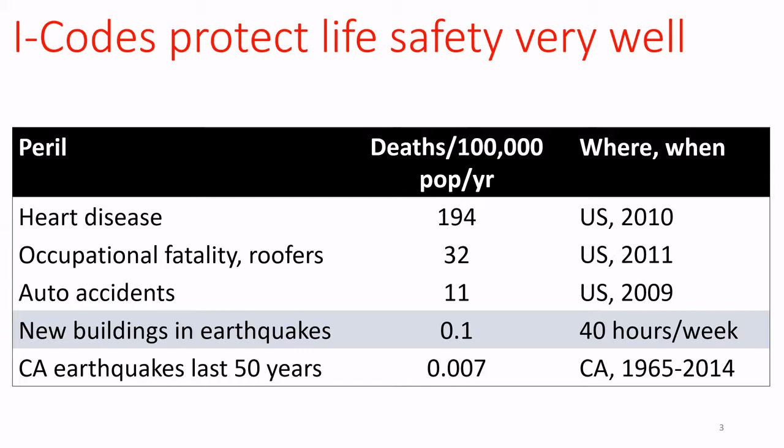California fatality rates of the last 50 years have been more than an order of magnitude smaller than that in terms of killing people. So the building codes do a really good job of what they're trying to do, which is protect life safety. But are the I codes ethical? Can they be said to be ethical? Now, ethics imply some deliberate choices about what one should do, what should be in the code, for instance, what should be the code's objective. What choices have the code writers actually made as they developed codes?

Now, codes have developed over many, many decades. You can track model building codes in the United States, at least seismic provisions, back to the 1927 UBC, where a handful, 2, 3, 4 building officials or structural engineers sitting around a room decided that if they made buildings resist 10% of their weight in lateral side-to-side motion, that was practical and okay. And that's as much thought as went into that process. Maybe that's oversimplifying slightly, but not much.

For the next several decades, we designed by a design paradigm called allowable stress design that did not allow us to quantify the risk inherent in the code. Now, in 1980, some pioneers of load and resistance factor design created a new design paradigm where we actually could quantify the risk inherent in our buildings, the risk of life-threatening damage. They back-calibrated the design requirements to achieve the level of safety that was implicit in prior codes. That is to say, they didn't adjust anything.

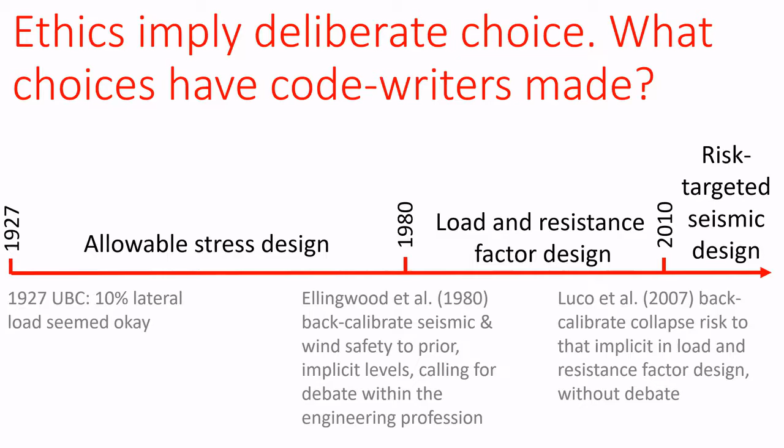With this back-calibrated level of collapse risk, which was back-calibrated to life safety, the probability of life-threatening damage, which was back-calibrated to allowable stress design, which had no deliberate choices made. So we never deliberately chose our resilience goals for buildings. Why did we never do so? I would assert that it's because we engineers, the people who, for the most part, write code objectives, have never been trained to do so.

We are very good at understanding science and making things work. If you set us a goal, we will be very good at achieving it. But we are not good at setting the goal itself. And what we did by just back-calibrating implies that whatever was acceptable in the past is therefore good. An 18th century moral philosopher named David Hume showed that you can't do that.

You can't say that whatever is, is okay. You can't get an ought from an is. That's called Hume's law or Hume's guillotine, or the fact-value divide. You can't infer that we ought to have a degree of risk currently in our codes just because that risk is present in past codes.

Okay, so if engineering is ill qualified to set what level of safety ought to be in building codes because we don't study oughts, what branch of scholarly study does? What branch of scholarly study focuses on norms or shoulds or oughts? And what are its three approaches?

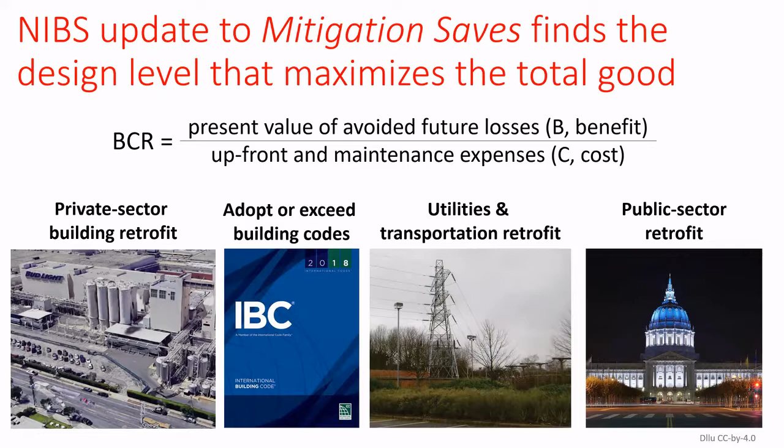And in that second category there, adopt or exceed building codes, we actually found a way to find the design level that maximizes the total good, that achieves Bentham's utilitarian ideal. Now, in doing so, we had to add up all the public benefits from all these different kinds of natural hazard mitigation. We weren't able to add them all up.

We were able to turn into monetary equivalents avoided future property damage, avoided future direct business interruption, that's DBI, indirect business interruption, that's the business interruption that you suffer because my business goes down and you buy or sell, you trade with me, and avoided additional living expenses, that's ALE. We also used monetary equivalents of deaths and injuries avoided, future cases of post-traumatic stress disorder, a little piece of the insurance premiums that people pay, some environmental losses, and we also count jobs gained and savings to the federal treasury.

Now, it would be better if we were able to count all of the benefits that mitigation provides. Avoided social stress, that is to say, the fact that your kid can go to school in his or her school tomorrow the same as he did today, that's a benefit. Saved mementos, memorabilia, protecting culture, protecting disadvantaged populations, our pets, and the environment. These are largely intangible benefits that if we could turn them into monetary equivalents would increase our benefit-cost ratios and make mitigation look better.

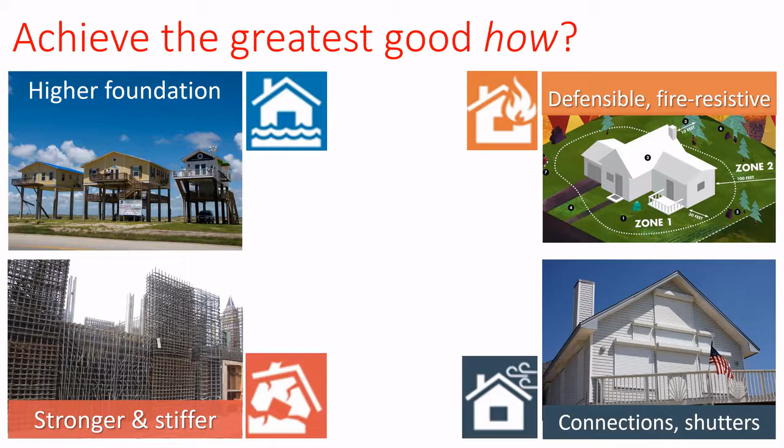Okay, so the building codes have developed over decades. Let's talk next about how much good that development has done in the past. The seismic and wind design provisions have evolved since about 1927, at least in the Western United States. And it's possible to read every one of these editions of the Uniform Building Code and the International Building Code and calculate the strength and stiffness of new buildings as if they were designed to each one of these codes. We did all that. We put it into a great big spreadsheet, and we found that buildings have generally gotten stronger and stiffer over time.

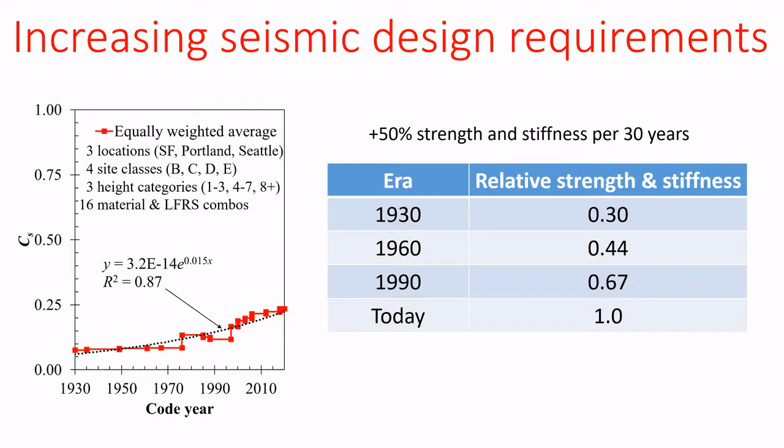And you can see that when we take a whole bunch of different buildings and a whole bunch of different locations and a whole bunch of different height categories and just sort of equally weight them, we find that new buildings have gotten stronger and stiffer by about 50% about every generation. So every 30 years, a new building built in the exact same place as an old building would be 50% stronger than that old building would have been designed. So codes have made newer buildings gradually stronger and stiffer.

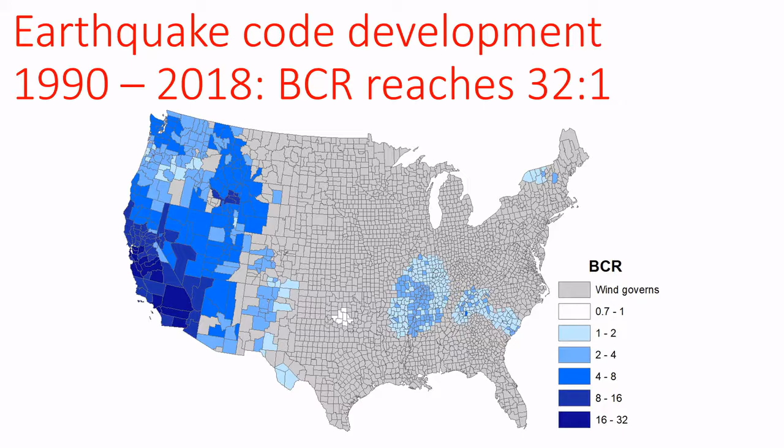All the gray areas are places where the wind forces are greater, so we can sort of ignore the code's seismic provisions there. But in any case, the building code's development over the past several decades has done society a lot of good, with benefits greatly exceeding costs by as much as 30 to 1. On average, overall, over the entire country, that nationwide average is 12 to 1.

But as I showed you on a chart a few minutes ago, we haven't leveled off at some ideal. What if we were to go higher? Is there some optimal level of strength and stiffness that we could put into our code to achieve that utilitarian ideal? So how do we know what is ideal? Engineering economics answers that question in general principle.

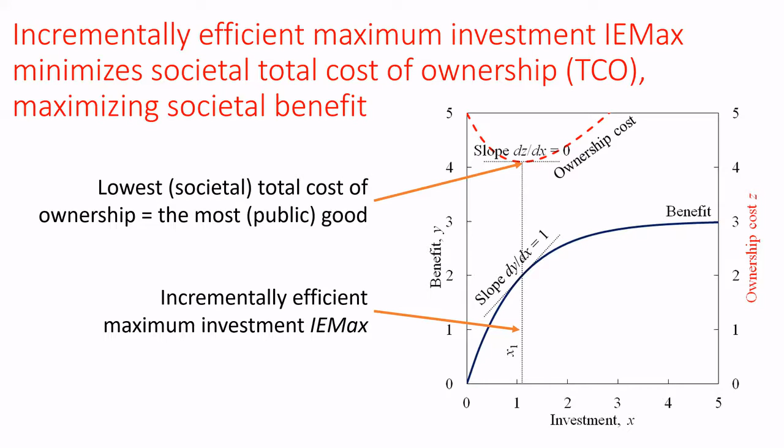So this is the least total societal loss, the least total cost of owning buildings for society, at the same point where this benefit cost ratio just reaches a slope of 1. That's the point that does the most public good for that building. Now, we actually did this for seismic loads. We didn't do a nice smooth curve. We set a few choices.

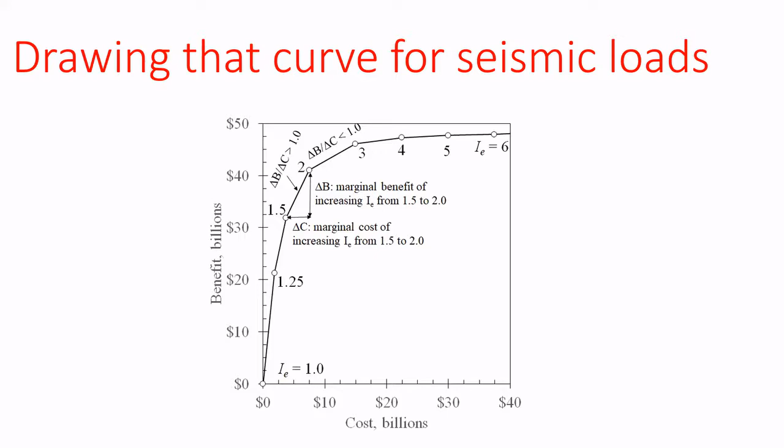In each census tract over the entire country, we considered what buildings are built there today, and what if we made them 25% stronger, 50% stronger, twice as strong, et cetera, up to 6 times as strong as the current code would require. So instead of a nice smooth line, we have this sort of jerky line of straight lines connected by dots, and we just find the last level of additional strength that has a slope greater than 1.

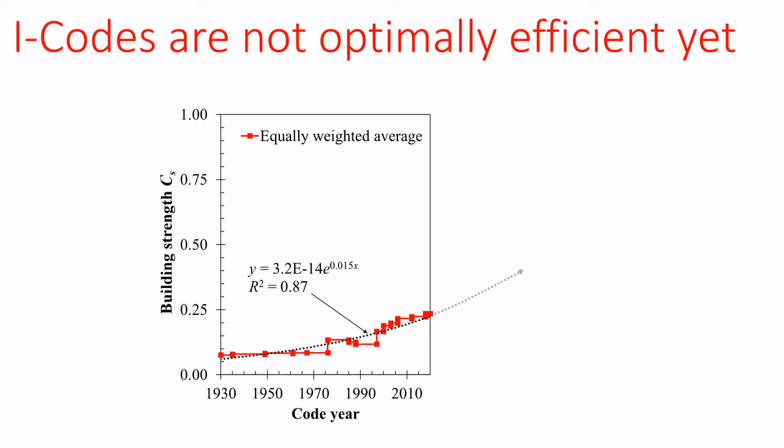And what we found was that we have not reached an ideal yet. So this is that plot I showed you earlier of how buildings are getting stronger and stiffer. And we haven't passed the point of diminishing returns yet. It is still in the future. That curve is going up, and if it continues to go up, the future will lead to more efficient buildings. Utilitarian optimal for seismic design is shown here on the right side.

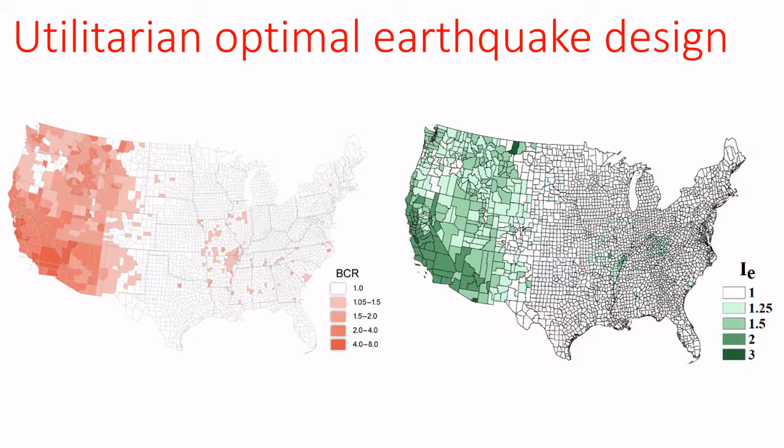The optimal level of design for several counties around the country is 3 times as strong and stiff as the code currently requires. But in many places, 25% stronger, 50% stronger, 100% stronger would be cost effective. On the left side, you're seeing the benefit cost ratios. So designing to the optimal level in many places around the country would save up to $8 for every additional dollar in construction costs.

Okay, so we did this for several perils, not just earthquake. We looked at riverine flood, hurricane surge, greater wind design, and adopting the International Wildland Urban Interface Code. And what we found was that the utilitarian optimum for these 5 perils has an overall cost to the country of $4 billion per year. That is to say, if we built to the optimum next year, new construction would cost $4 billion more in construction costs, but it would save society $16 billion in avoided future losses for an overall benefit cost ratio of 4 to 1.

And that means building houses and other buildings that are next to rivers with 5 feet of freeboard rather than 0, 1, or 2, which is what we currently do. Building coastal buildings basically 1 story above the 100-year flood line, base flood elevation plus 8 feet. And for wind, we looked at the IBHS fortified home hurricane standards. For earthquake, I've just talked about that, and I've just talked about the wildland urban interface fire. But you can see the benefit cost ratios are all in the range of 4 to 1 and up to 7 to 1, all very, very good returns for an investment.

So let me recap a little bit about the ethics of the building code. The current code is suboptimal in many places. Well-accepted fundamental utilitarian and duty ethics underlie the U.S. Constitution, and we found utilitarian optimal performance goals with well-established engineering economic principles. This is not pie in the sky stuff. This is using engineering economic principles just with the assumption that we should design to the level that benefits still just exceed costs. We found that leaving the current minimum in the rest of the country makes sense from a duty ethics perspective of just being fair across the country. And then together, utilitarianism and duty ethics could provide an ethical foundation for a resilient building stock.

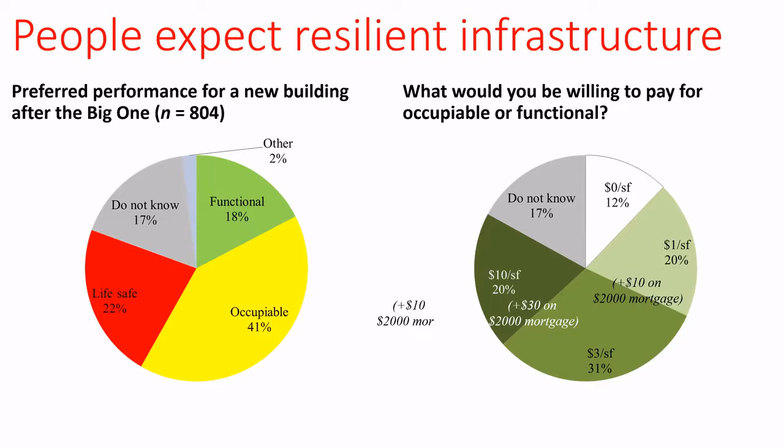The respondents were also asked, if you could get that level of occupiable or functional performance, would you be willing to pay $0 per square foot, $1 per square foot, $3, et cetera? And this was all expressed also in terms of additional monthly dollars on a $2,000 mortgage, so that they understood what it was that we were asking them. It wasn't just numbers that you couldn't really wrap your mind around. And as it turns out, yes, they would be willing to pay for what they were asking for. It would cost about $3 per square foot to achieve this level of performance of occupiable or functional buildings. Okay, so that's the public's perspective.

But we're not simply engineers and the public. We are a heterogeneous society with multiple perspectives. So what are the other perspectives that matter? Well, obviously jobs matter.

And as it turns out, building better would produce more jobs. The last 30 years of code development added 30,000 long-term US jobs that go into producing more construction materials. And optimal design would add another 60,000 more long-term jobs.

Affordability matters. Now, you increase the cost of construction, and maybe that impacts the affordability of housing and whatnot. But maybe it doesn't.

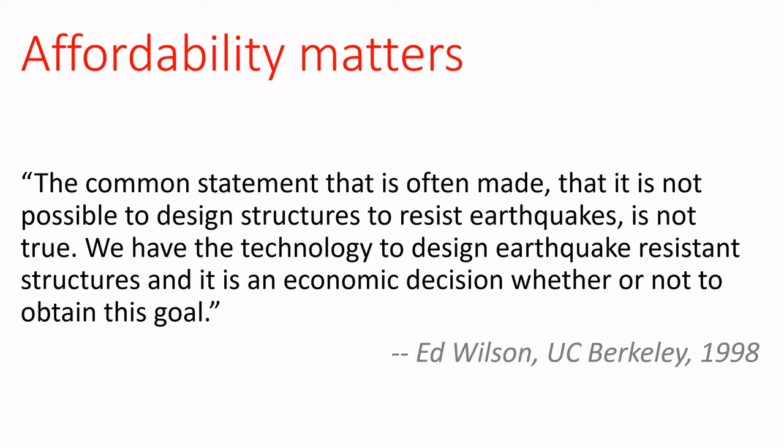A hero of mine, Ed Wilson, an emeritus professor at UC Berkeley, said several decades ago that the common statement that's often made, that it's not possible to design structures to resist earthquakes, is not true. We have the technology to design earthquake-resistant structures, and it's an economic decision whether or not to obtain that goal. So he's making this assertion a couple of decades ago. Let's find out if he's right.

Now, several studies have looked into what it would actually cost to make our buildings stronger and stiffer. In the lower left, you're seeing a study by the National Institute of Standards and Technology that found that making buildings about 60% stiffer and stronger adds about 0 to 1% to their construction cost. The CUREE-Caltech wood frame project, looking at one particular wood frame building, found that it would cost about 3% more construction cost to make that building better resist earthquakes.

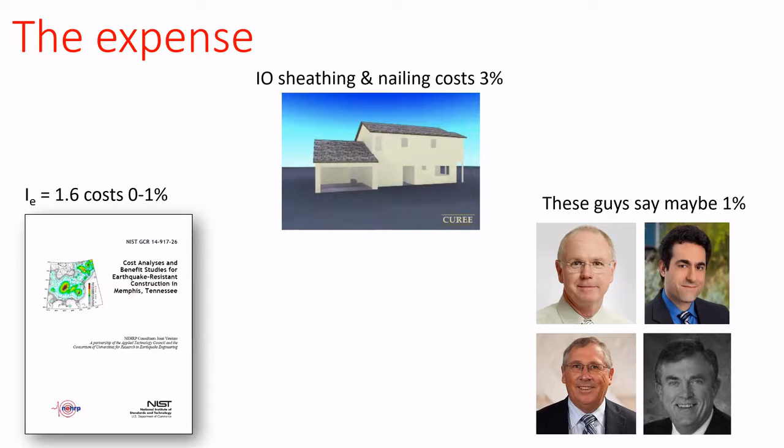And several leading structural engineers, when I asked them what it would cost to make buildings 50% stronger, said, order of magnitude 1%. So there's a little bit more evidence to suggest that the cost is on the order of 1%. Now, how can that be? How can it be that making buildings 50% stronger can only increase construction cost by 1%?

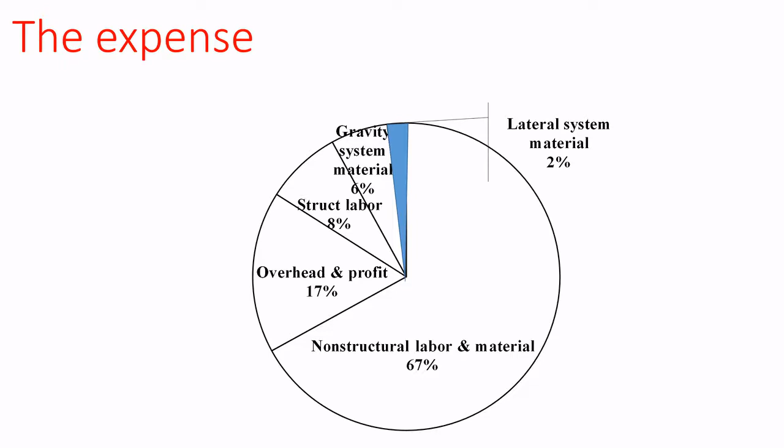Now we have further evidence that it's a very small cost because we do this all the time without actually thinking about it. We build buildings to varying levels of strength and stiffness depending on where they are relative to earthquake faults. We could build a building in downtown Los Angeles just to meet code, pick it up bodily. Imagine that you're Superman and you can pluck that office building out of the ground and fly it over to San Bernardino and pop it down into the ground there. It would be 50% stronger and stiffer than it would have to be if it were designed for San Bernardino.

Similarly, you could take a building in downtown San Francisco or downtown LA that just met code, put it down in Seattle, it would be 50% stronger and stiffer than it needed to be. Put it down in Sacramento, 50% stronger and stiffer than it needed to be. Twice as strong as it needed to be in San Diego. So we do this all the time without noticing.

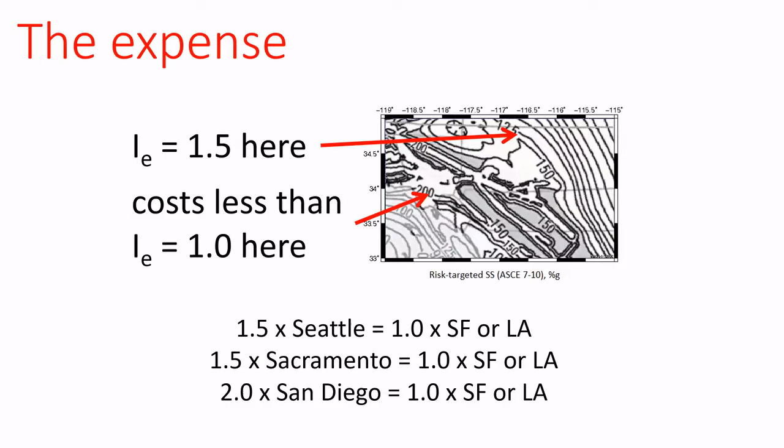Now, would the expense of greater strength and stiffness be objectionable? Lucy Jones, the famous seismologist, spoke with the Building Owners and Managers Association of Greater Los Angeles, and she said that most members of BOMA know the code is life safety, but they told me they wished it was higher. They don't want to own a building that'll be a total loss, but they can't afford to do it alone and be more expensive than their competitors. So greater cost is objectionable if you have to do it voluntarily, but maybe not if it is mandatory across the board.

A little bit more evidence that the code doesn't add much cost when it comes to developing seismic provisions is a study by Rob Olshansky and others in 1998 that said that the codes as a whole only add about 1% to the construction cost to meet seismic provisions.

Okay, so would that 1% affect affordability? Well, it's really hard to make that case when housing is already incredibly expensive. In San Francisco, housing costs $1,000 a square foot. In Santa Clara County, it's $600 a square foot, of which only a small part, 30 to 40%, is construction.

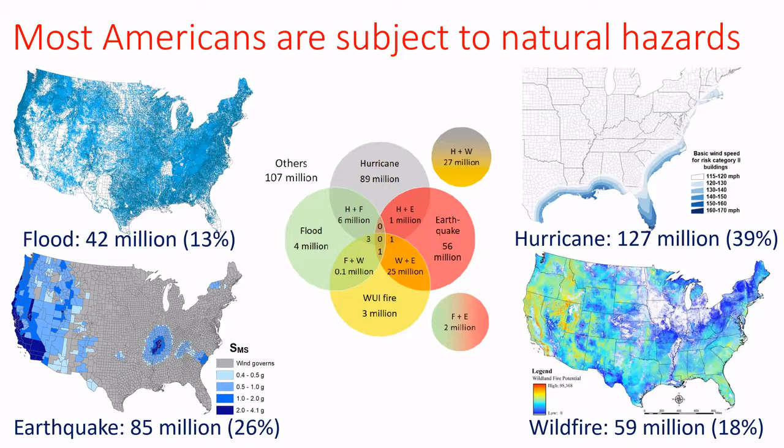Most Americans, in fact, are subject to natural hazards. 42 million people live in the floodplain. 85 million people live in places where earthquake loads govern design. That is to say, the building has its lateral strength because of earthquake rather than because of wind. 127 million people live in hurricane country, and 59 million people live in the wildland-urban interface. This very confusing Venn diagram in the middle just goes to show how many people live in hurricane and flood country. It's the intersection between the two upper left circles. 6 million people are subject to flood and hurricane. 25 million people are subject to earthquake and wind, etc. So most of the country is subject to natural hazards.

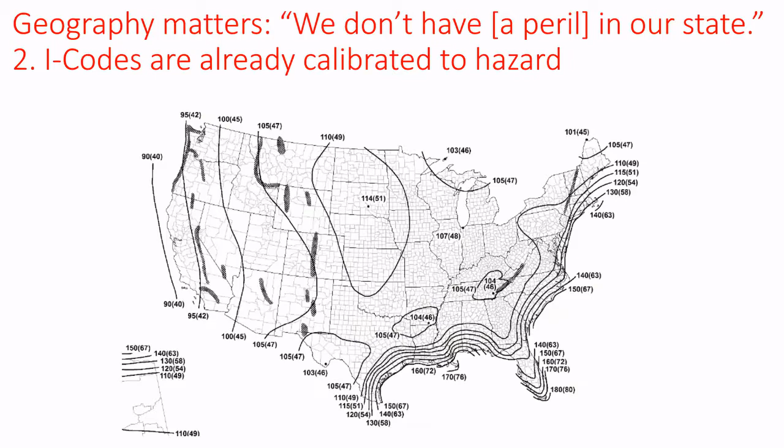The second answer to "we don't have such and such peril in our state" is that the I-Codes are already calibrated to hazard. So the less your seismic hazard, the lower the design requirements are for you. So if earthquakes are less of an issue because they happen less frequently, well, they contribute less to the construction cost of your building because the codes are calibrated that way. Furthermore, just because you don't have earthquakes doesn't mean that you're immune from them. My disaster, my earthquake is your disaster. The economy is so intermixed that an earthquake in Southern California would affect virtually the entire country.

Okay, but short-term interests of different populations can also diverge. Now, for a little bit of context, you have to understand that we're building about $1.3 trillion per year of new construction, and we're losing about $100 billion a year, probably more, to catastrophe losses. Adopting the modern codes, using today's codes rather than those of 30 years ago, has cost builders about $1 billion per year in higher construction costs. Now, if you compare that with $1.3 trillion a year in construction expenses, that's a few hours of added construction costs.

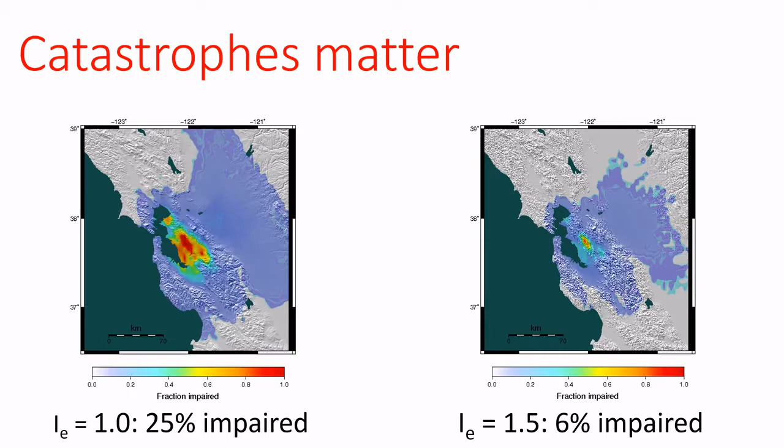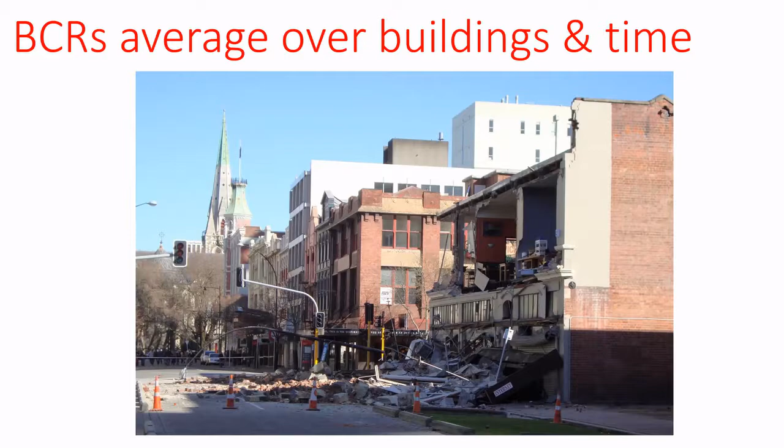Now, there's some limitations here. Benefit cost ratios average over buildings and over time. So two buildings might both put more cost into stronger, stiffer, better, and only one actually benefits because one suffers damage, and they don't all suffer the same level of damage in the same earthquake, as this picture illustrates.

Some additional social challenges to better buildings. Engineers commonly push back when I talk about who should decide and on what basis. One of them said, who better to judge than us engineers? Well, that argument would be more valid if we had ever judged. We have never actually judged what the appropriate level of seismic resistance was. We always back calibrated, and we never asked anybody else to judge. The back calibration vastly diverges from the public's preferences, as I suggested with that public opinion survey.

Okay, well, when you say the public ought to decide, engineers are members of the public, so we can decide on behalf of the public because we are the public. That actually isn't true at all. If you look at the Subcommittee on Seismic Loads for ASCE 7, 84% of them are professional engineers or structural engineers. So they're all engineers basically, and the main committee is 90% engineers. So are engineers the public?

The American Society of Civil Engineers Code of Ethics distinguishes between 5 groups. The public comes number 1, our clients number 2, our employers number 3, the profession number 4, and number 5 are individual civil engineers. There is a distinction there, and that distinction matters because the interests of those 5 groups diverge. Only one group's interest can be held to be paramount, and that's what the ASCE Code of Ethics does. It says you shall hold paramount the safety, health, and welfare of the public. And in that case, it's distinguishing between the public and civil engineers. So no, engineers are not the public.

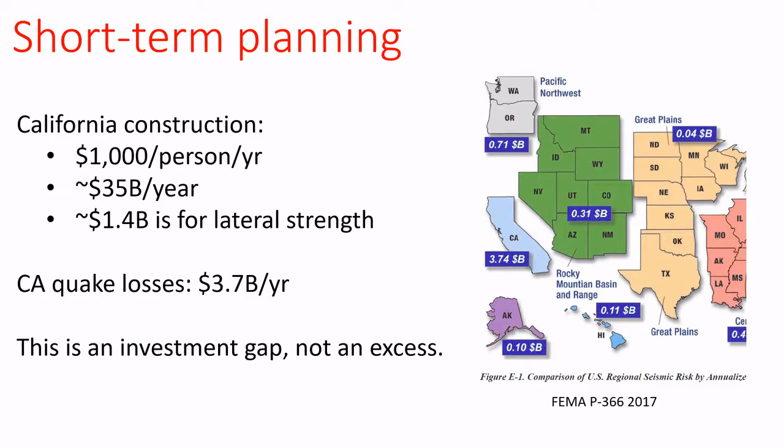So, some conclusions. Engineers never chose appropriate resilience because we're unequipped to do so. We are not philosophers, we're not ethicists, we aren't trained in utilitarian ethics. The seismic provisions of the I-codes do protect life, but they provide a false economy, protecting developers at the public's expense. The public expects and is willing to pay for resilient infrastructure. It's practical and ethical to build more resilient infrastructure. Society can afford it. We would save more than we spend in lives, property, economic shock, and government resources. And if we think resilience is costly, let's just look at the bill for the lack of resilience.

A final thought on ethical, efficient infrastructure. I showed this research to my hero, Ed Wilson from UC Berkeley. He said, this is not research, it's common sense. So that's the thought that I want to leave you with, that it is simply common sense to build buildings better. And with that, I'll take questions.